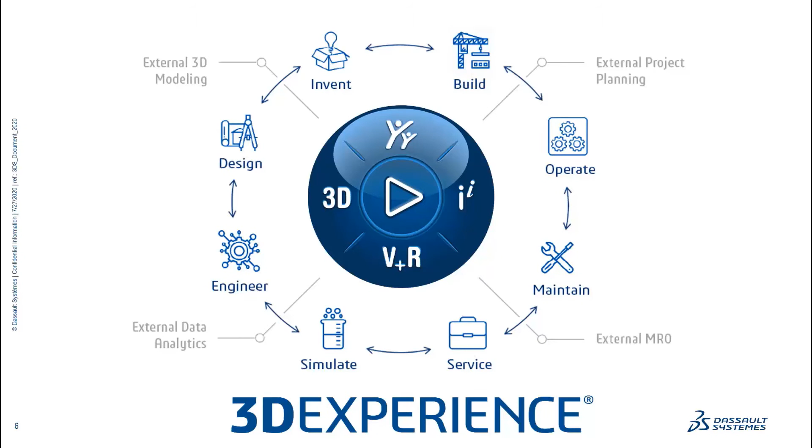So I think that gives a good picture, but how does this look in practice? I've brought a screenshot here of the 3D Experience platform. This screenshot shows us more than you would expect. First of all, we can see native SolidWorks files, where we have the SolidWorks logo. We have got native CATIA files, which are combined. And on top, we have got a native 3D Experience file, which is the assembly for that.

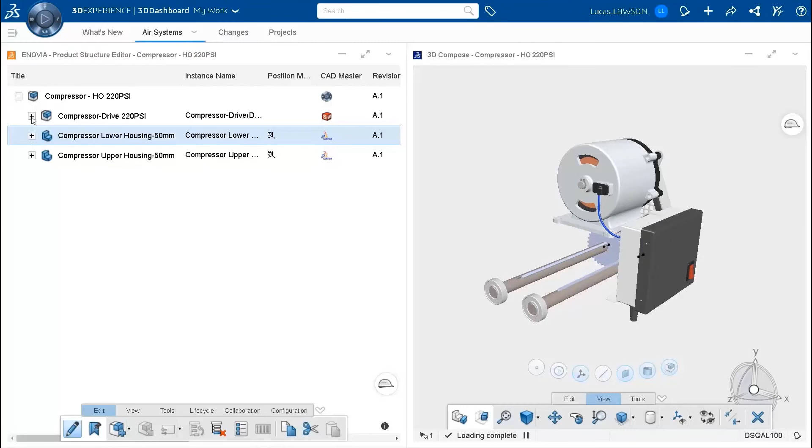But the 3D Experience platform is not only fully multi-CAD capable, it's also multidiscipline, because we see here the mechanical engineering coming from SolidWorks. We see electrical, we see harnessing, and even going down to PCB design. So this is a very holistic approach. But in the example we are talking about today, it is about electrical, CATIA Electrical and SolidWorks. And we start off with SolidWorks with a structure mechanical design.

All the data is held together by ENOVIA PLM for our KM use. And in there, we hold all the requirements. It's traceable. We have got a digital mockup tool in there, the project management where we can monitor all the tasks, and even down to the change management. And don't forget the bill of material. We'll show now how these three parts come together in a specific example with CATIA Electrical and how we do electrical systems engineering on the cloud.

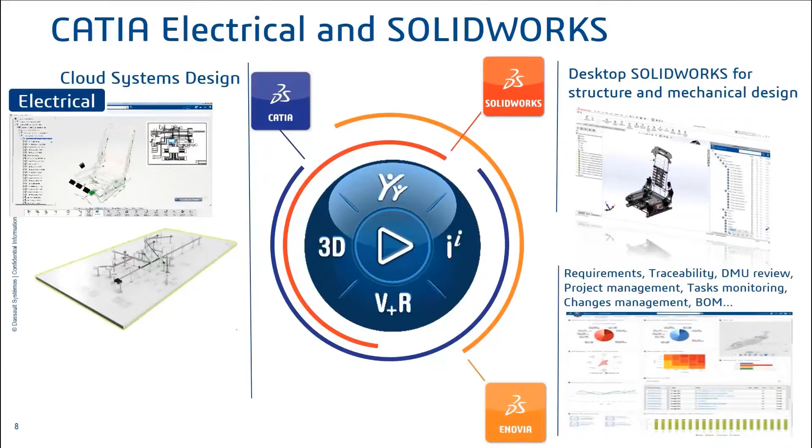Thanks, Thomas. I would like to start highlighting this process with a video showing the collaborative design in SolidWorks and CATIA enabled by the 3D Experience platform. So let's start this video.

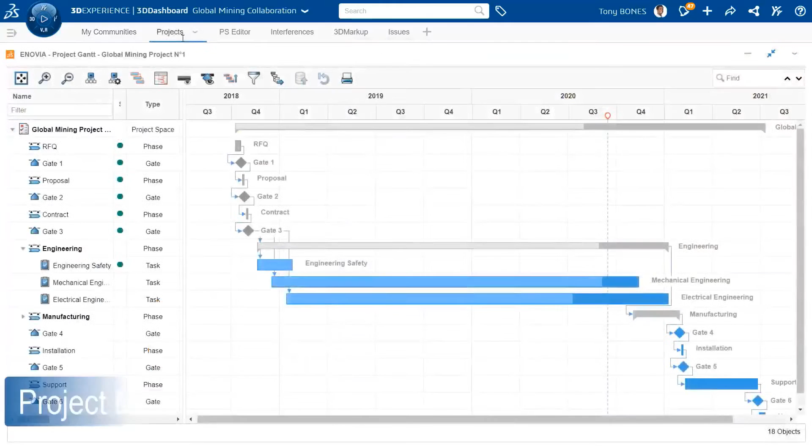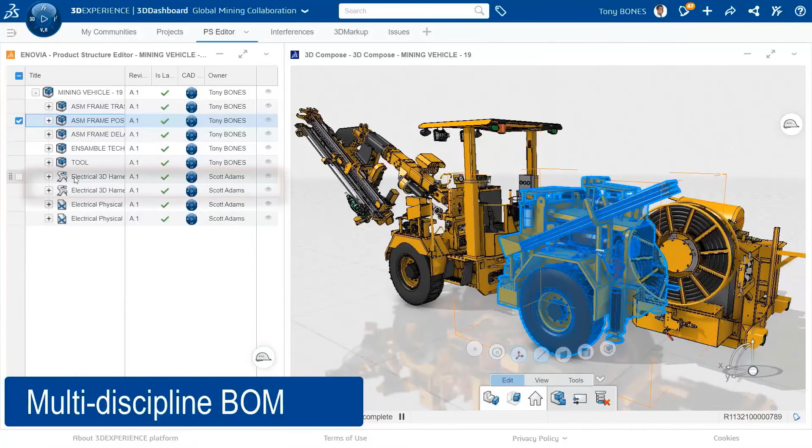Here we are from a web browser reviewing the dashboard of the project, where we can, for instance, highlight and review the task, and as well navigate into the project data structure. So we can review any type of data, whatever is their authoring tool for design. Here, for instance, the structure is defined in SolidWorks, authored by a SolidWorks designer, and the electrical harnesses are designed into the CATIA application.

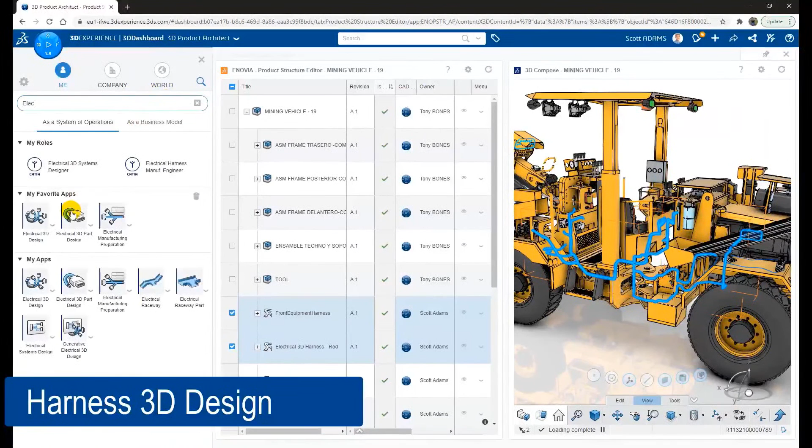So we are here in a multidiscipline BOM review. We can now jump into the shoes of the electrical designer, so we can directly, from this navigation browser, jump into the 3D application on the west side of the compass and directly reach the electrical application of CATIA.

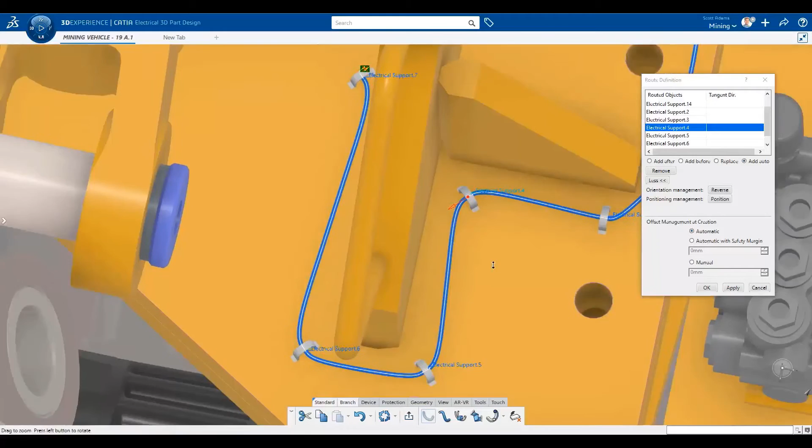So we can see quickly here the design of the harness, which will be reviewed later in this session more in detail. We route the segments of the harness. You see here that we can directly design and place the component over the SolidWorks structure. It's fully compatible as multidiscipline design, and we get connected directly to the equipment.

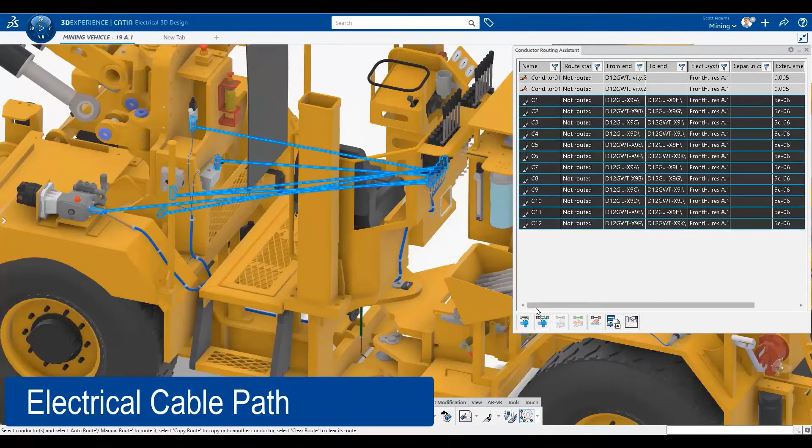We can review some quality checks here, such as segment connectivity, and we have here, following the cable assignment into the segments, where we will define the cable route and adjust the length of the cable, but also the segment diameters.

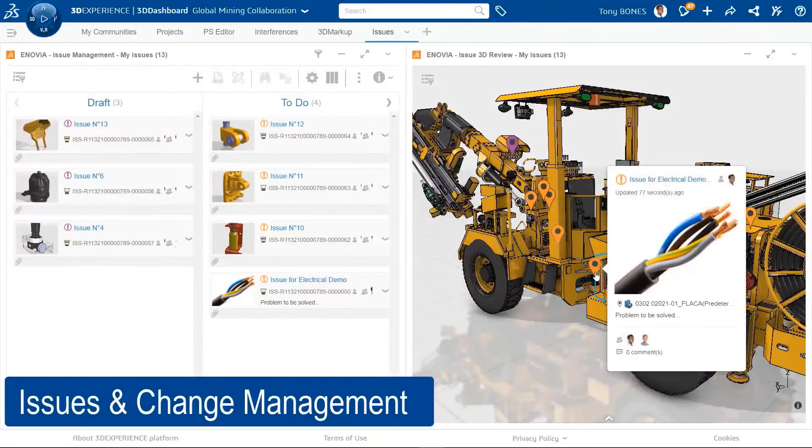Now we are back to the collaborative view, back to the platform analysis where we perform some checks and detect some interference clashes. These clashes are notified by 3D markups with some tasks associated to be reviewed by the designer.

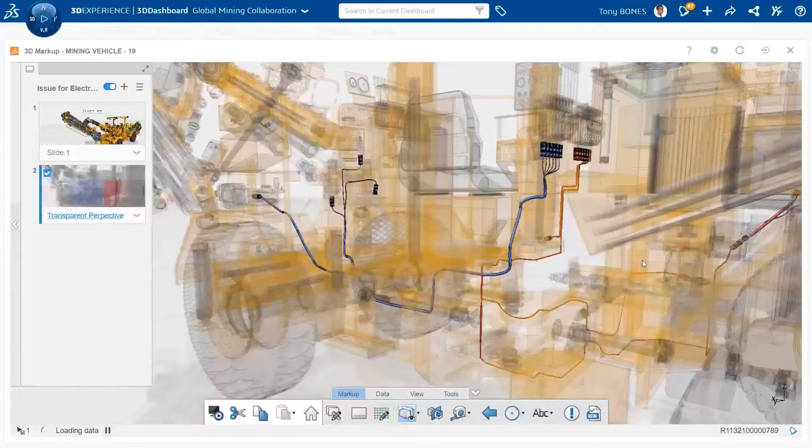So the tasks, the data, are assigned to the users for modification. So the user can jump into the 3D markup to review in detail where is the interference, and then open its data to perform the modification.

So here we will modify the structure done and authored into the SolidWorks interface. So the designer here is opening directly the data assigned to the task and to the change into the SolidWorks app.

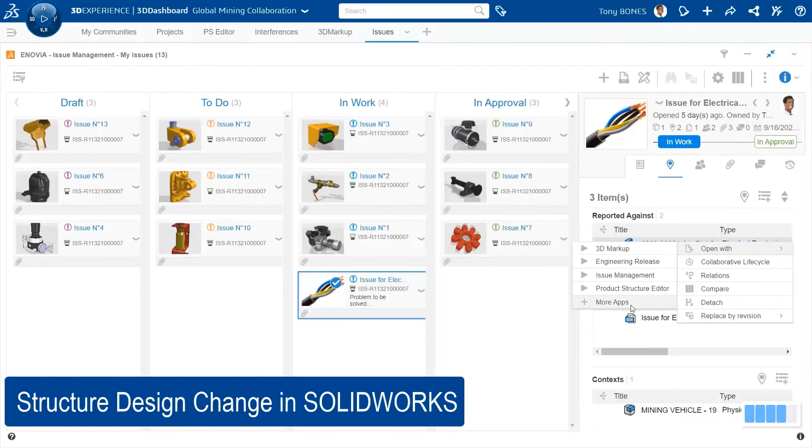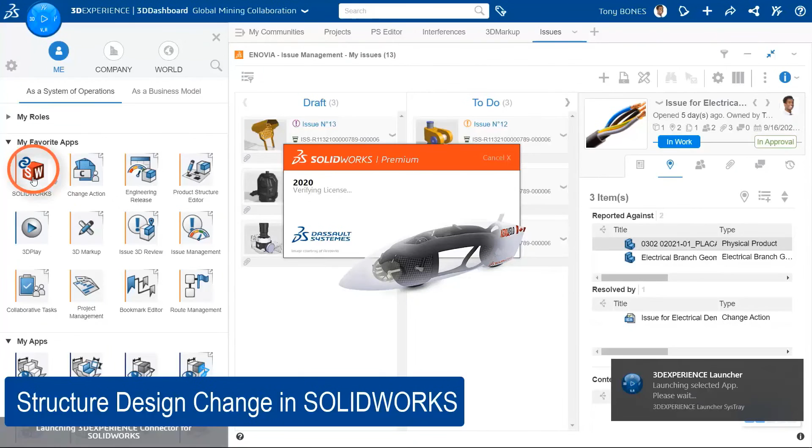So here SolidWorks is starting and the designer is performing the changes. So we see here that the SolidWorks interface is also connected to the platform. So the change is directly saved into the platform.

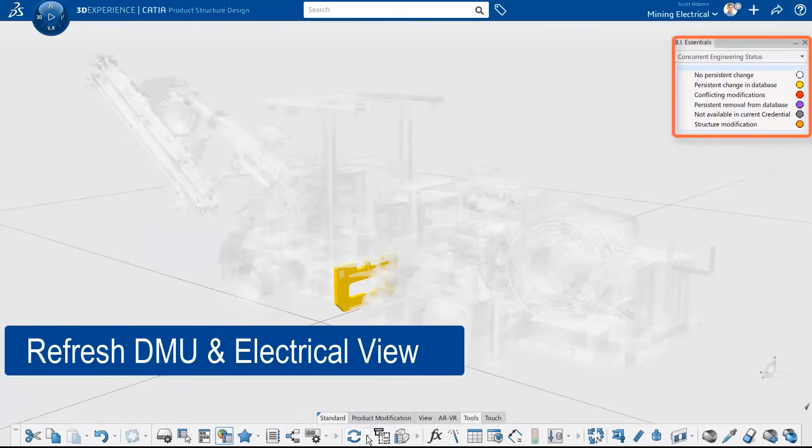And the data can be reviewed instantly with a refresh. So the electrical designer and any DMU digital mockup responsible can refresh the data and review the changes. So here we see that we have a smooth navigation into the data, whatever is the source of design, whatever the CAD we are using, either CATIA Electrical for the harnesses or the structure done in SolidWorks.

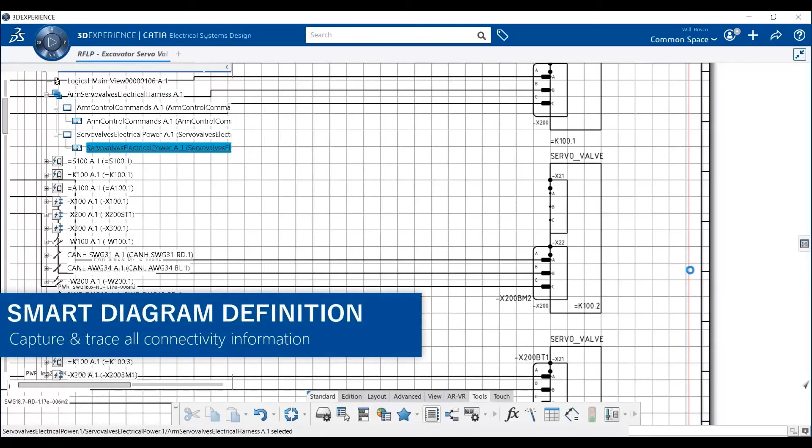Net and wiring diagrams. So we are here having a view of the connectivity diagram generation, such as equipotential nets or wiring diagrams. It's an easy description of components like connectors and cables, either on the fly or reusing from existing libraries, databases, or existing diagrams.

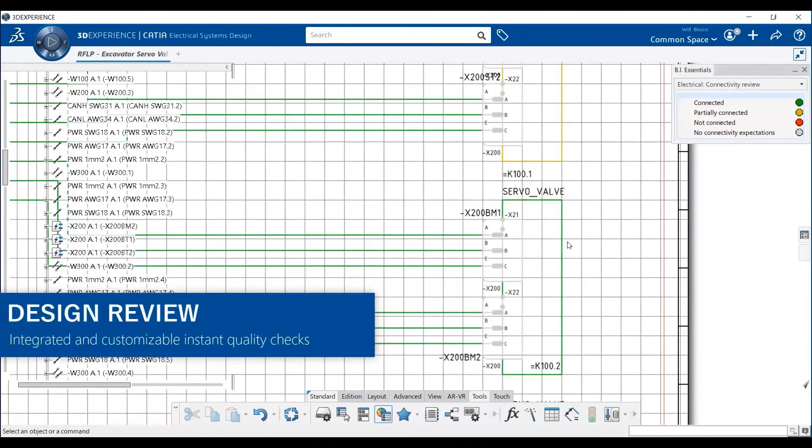It describes all the connectivity information with their properties. It defines smart diagrams into the system. And the platform also delivers a set of instant checks to make sure the design is compliant with requirements.

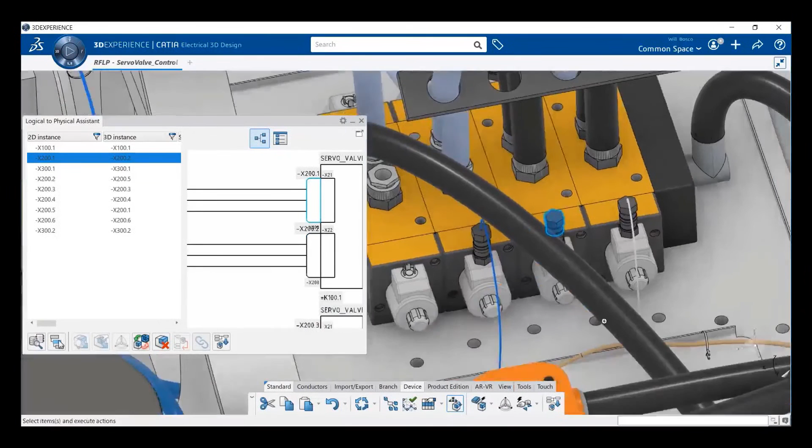We have then an intelligent synchronization with the 3D mockup, which can check everything from the diagrams is available and well-defined in the digital mockup. So we can have here the cross-review of the definition from the diagrams to the 3D design.

This will help the 3D designer to drive its design based on the electrical's information and properties. Any change would be able to synchronize, and then there is also design checks consistency with cross-highlight from diagram to 3D view.

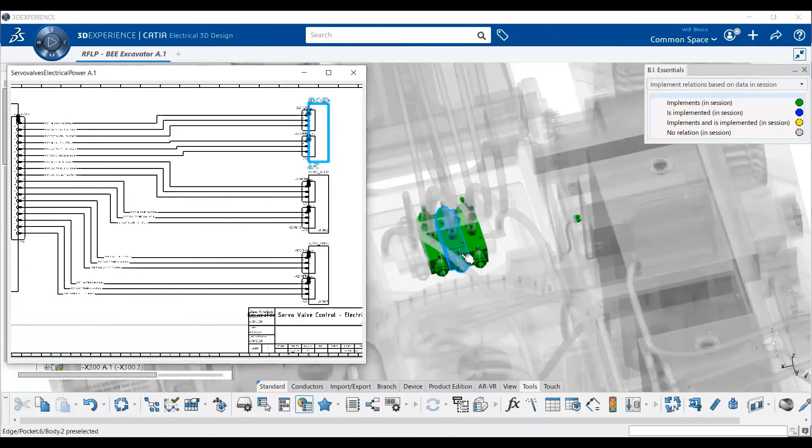Let's jump now into the shoes of the 3D digital mockup designer.

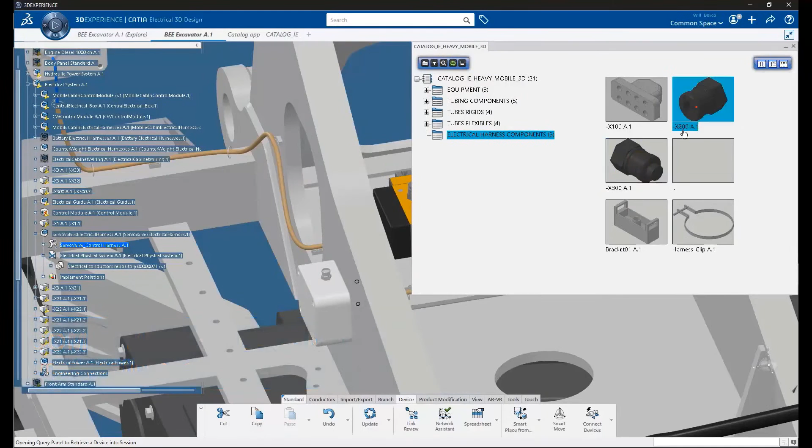So we are in the CATIA 3D electrical interface, and we will enrich an existing diagram, starting with electrical component management that we can pick from the libraries. It's a multiple selection and filter from the diagram based either on keywords or properties, with an easy placement which we call smart placement, over the surfaces.

So you see here that you can really quickly and easily place a component with smart positioning. These components have intelligent connectivity points, which will be recognized for all the electrical description of the system.

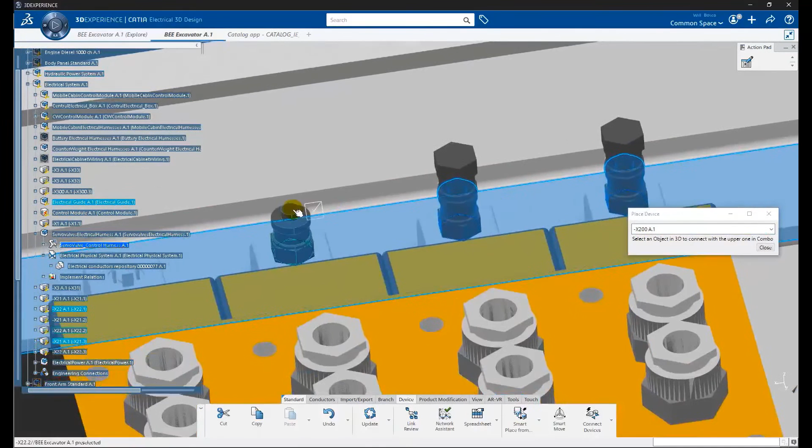Here we start to define the harnesses, which is space allocation for the wires, using this component and describing the electrical information. So we can directly connect to the existing network and enrich, selecting all the components. The designer has an instant check with icons of its connectivity.

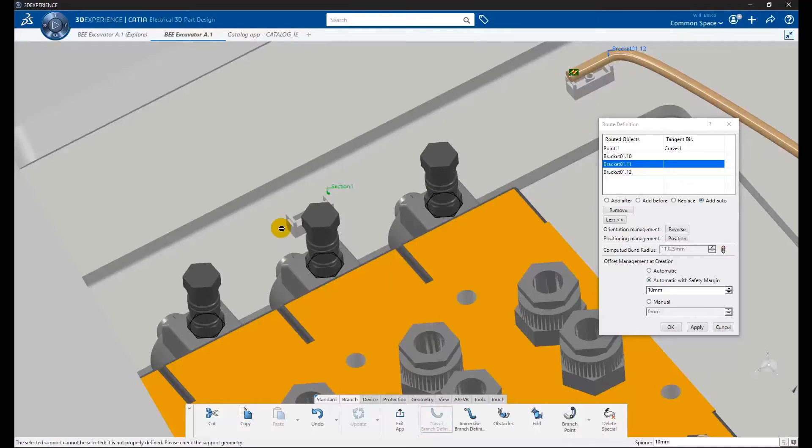You can also manage electrical properties such as diameters, bend radius, drive the design with lengths or with slacks. We see that it's instantly modified based on these properties, which are electrical information.

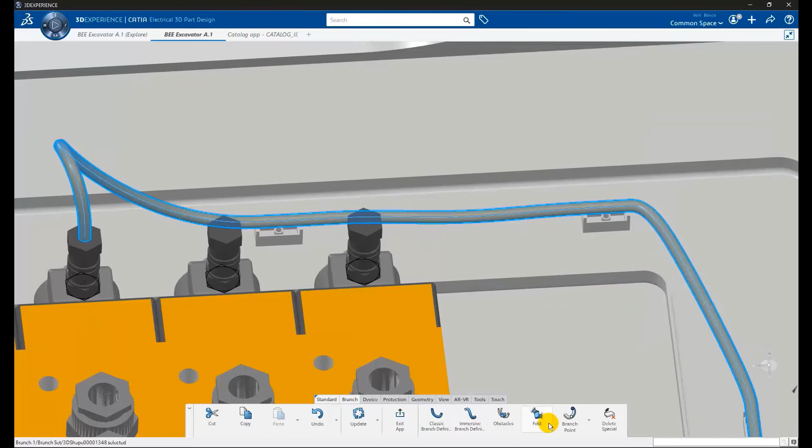So we can enrich with multiple connectivity, easily and quickly, with offset positioning of interface points, junction points. And you see instant visibility of the connectivity status.

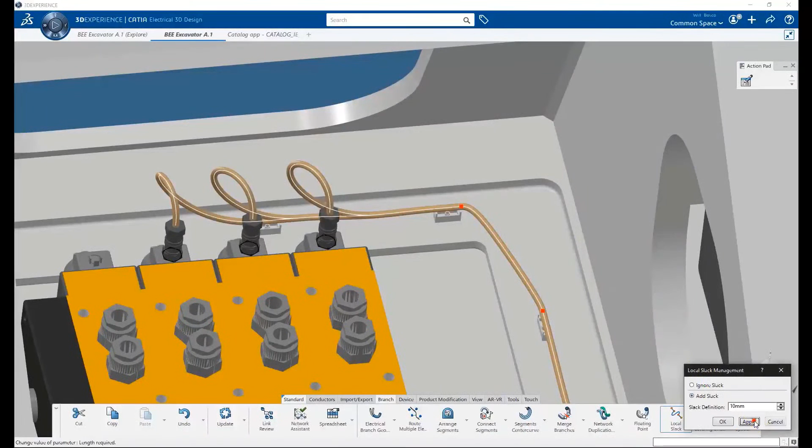Then we have a set of definitions like slack management. We can add the length on some portion of the design, and also protection covering definition.

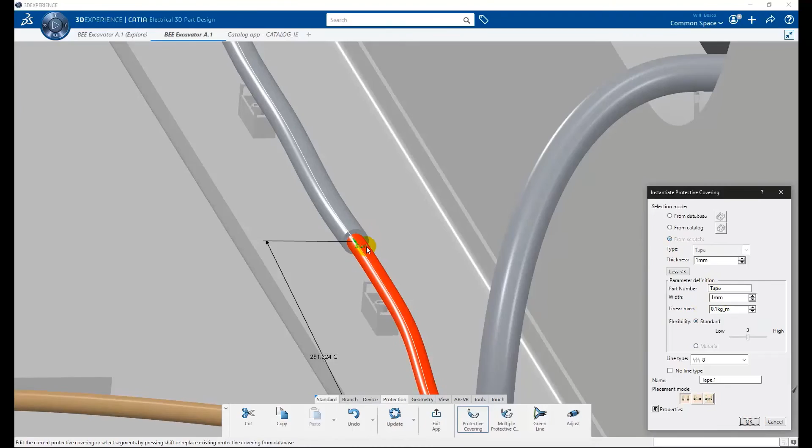Sleeves, thermal protection, mechanical protection, which you define with the right length, which allows having the proper diameter, space allocation, analyze clashes with the structure, and have the right dimensions for the harness. There is also here some connectivity checks with color interface.

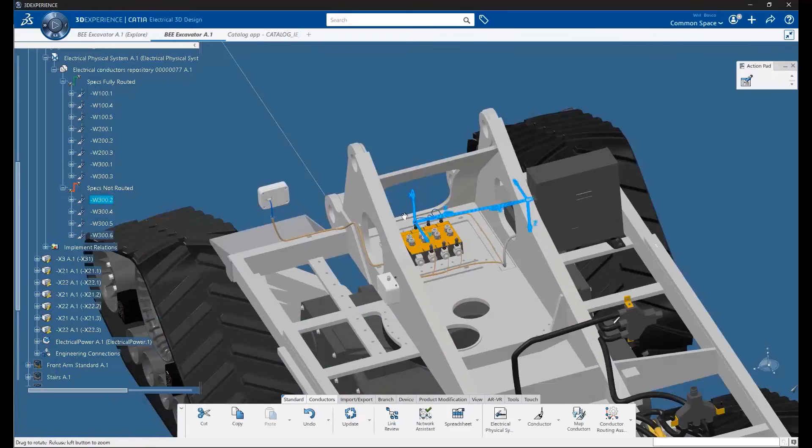And now we will route the wires. So we get the wires from electrical definition, either with the smart diagrams or with Excel sheet or listing. Then the system is describing direct connections between extremities. And will now route, meaning allocate these wires into the harnesses that has been defined.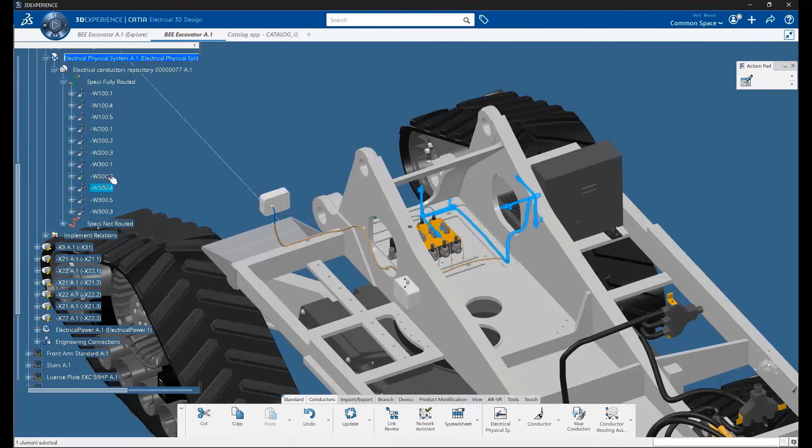This will allow generating the right lengths for the wires, but also updating the diameter, then having a global consistency of the digital mockup. It will also be the starting point for harness manufacturing, which we need to know the electrical information for.

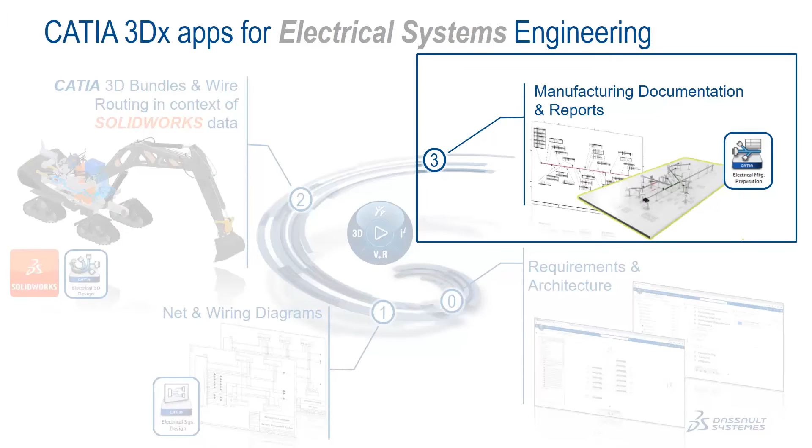Last but not least, we have the capability with a very powerful application to generate the drawing for harness manufacturing, either form board or harness drawings. So let's review shortly what we can offer.

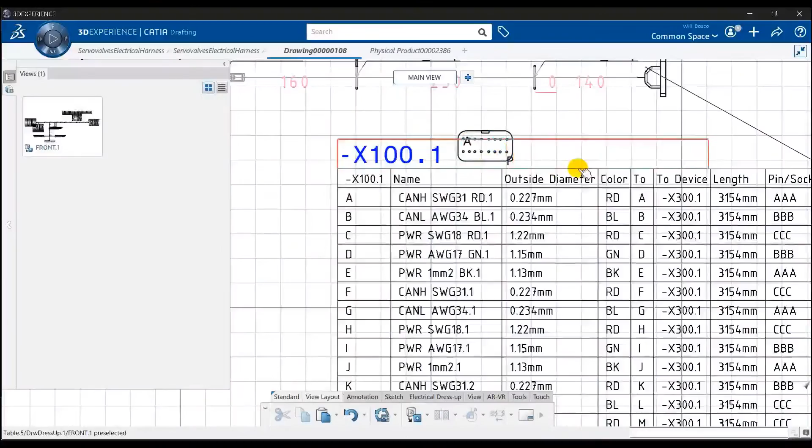We have harness drawing generation, which we used to call one click, with automatic length annotation, automatic properties display based on the company definition. We have here properties for each wire and cross-section view for the connectors. All this display is fully customizable.

It's designed based on the company rules and the project definition. You have here symbolics for protective covering, automatic report integration, which are completely smart and linked with 3D design. Any change is updated based on the change of definition of the design.

We have also the jigboard generation, which is pretty similar to the first generation, but which is taking into account all the topology of the harness. All the design information, bend radius, rules, diameters are taken into account in this design.

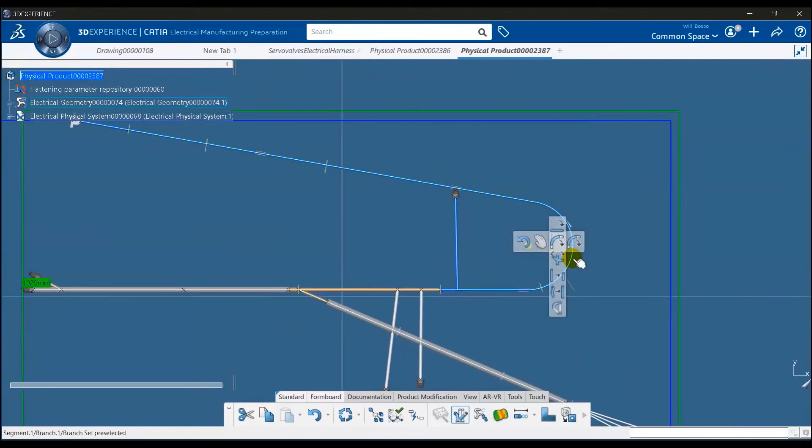We have also a smart layout definition, which is a bit accelerated here, but which assists the designer to really create the jigboard information that's needed for manufacturing.

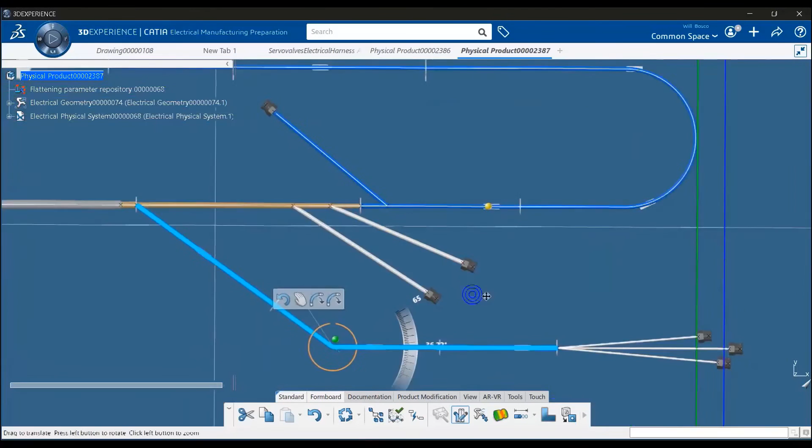This manipulation takes into account, you can define here your own rules for the manufacturing and the layout of the jigboards. It will check the bend radius information, it will check the minimum angles for production, and all this kind of information you need to check for your design, such as splice manufacturing and properties.

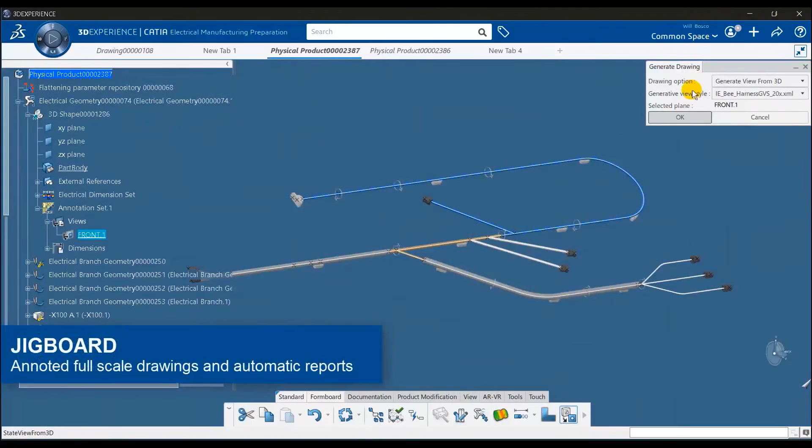So it's a really ergonomic and easy to use interface. Now we generate the drawing, same as the harness definition, all annotated with the symbolics that are required, cut length, for instance, properties, and back view of the connectors.

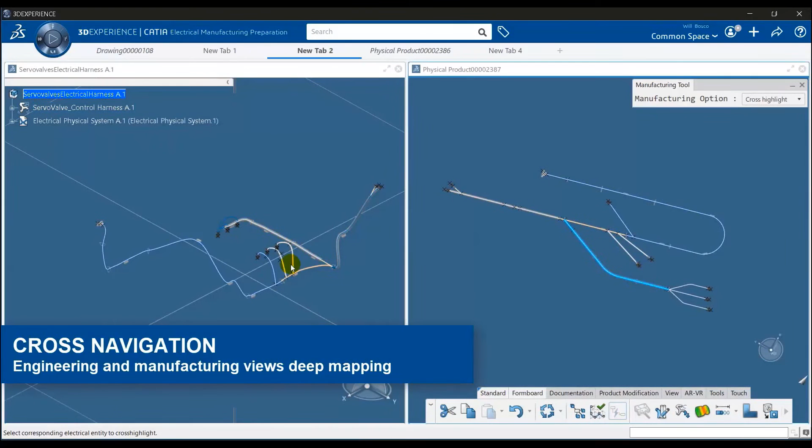One powerful capability as well is this cross navigation. You can really control your design of the form board or the flat view with the 3D definition.

An important capability as well is the torsion management, twisting of components when you place them in the jigboard compared to the 3D design. So the user can manipulate and control the constraint he's defining.

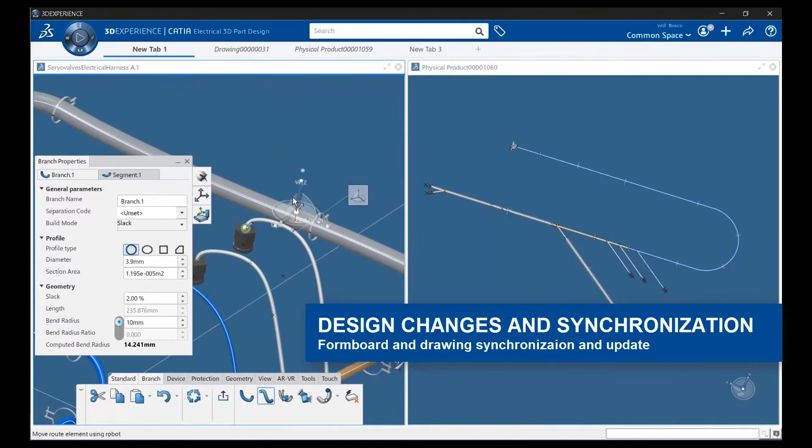And final view, we are seeing a review of design change synchronized in the form board. So any change can be updated, but with control. It's a capability to check the cost and the number of updates to bring into your form board at any changes.

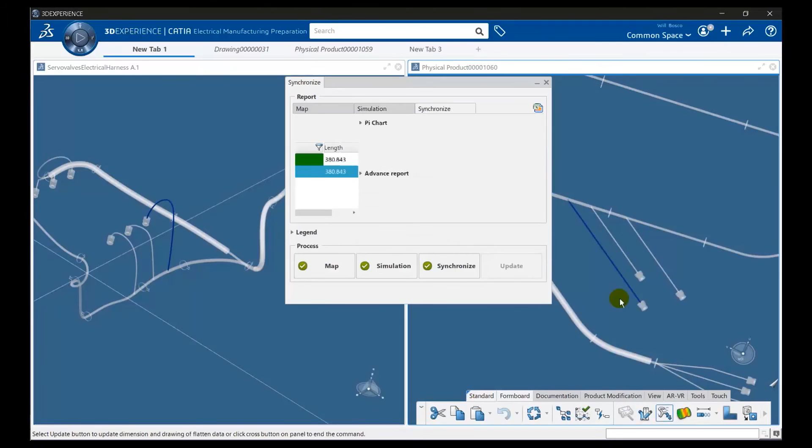Thank you, Axel, for this interesting insight into the electrical systems engineering. And what can we conclude from that?

What we have seen today is the 3D Experience platform, with some basic apps, the collaborative backbone of the 3D Experience platform. And we've used a specific example where we coupled the power of SolidWorks and the power of CATIA Electrical.

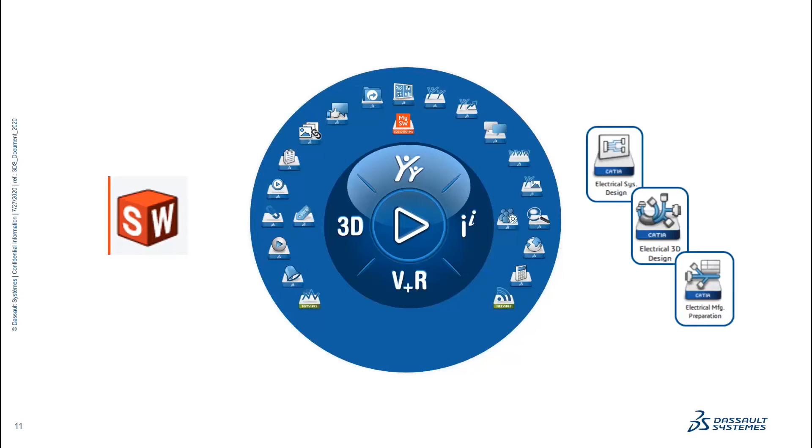But this was only a small insight into what is possible and where the future is going. Because if we look further ahead, we have a lot of stuff within the Dassault Systèmes portfolio, and it starts from design and engineering to PLM to simulation and even to manufacturing, and sometimes it can be a bit overwhelming.

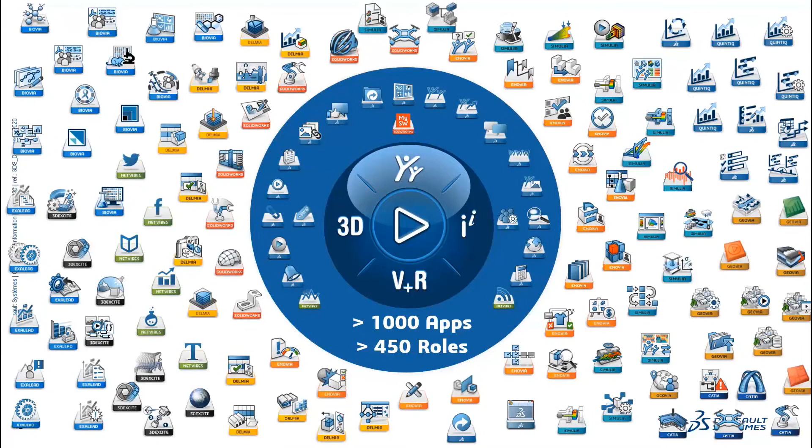But the key is that there is value in having access to all these capabilities when we need them. And all these are native to the platform, so we don't need to worry about translating data from A to B.